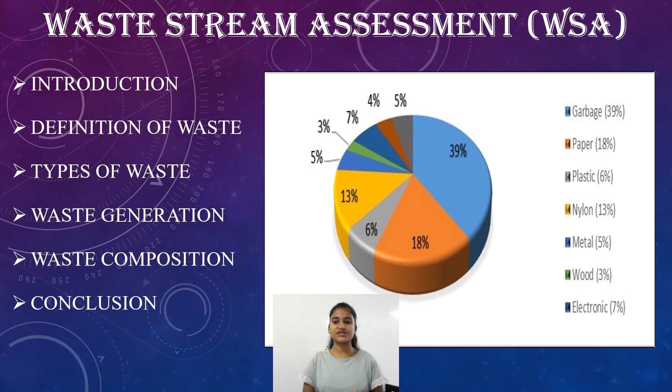Here we are going to learn the introduction of waste stream assessment, definition of waste, types of waste, waste composition, and the conclusion. Let us move to the introduction.

Waste stream assessment is a comprehensive process that involves identification, quantification, and characterization of the different types of wastes generated by the organization. WSA is a critical component of a waste management program as it provides valuable insights into the types and quantities of waste generated, and helps identify areas where waste reduction efforts can be focused.

This process is used to provide a detailed understanding of the waste stream and to identify opportunities for reducing, reusing, or recycling waste. Waste is generated by domestic and industrial activities, and the waste stream is the life cycle of waste up to and including its disposal.

Waste stream assessment can be obtained by two methods: rationale for analysis and field investigation. Rationale of analysis is planning or designing for disposing waste, and field investigation is waste storing, vehicle weighing, or field visits.

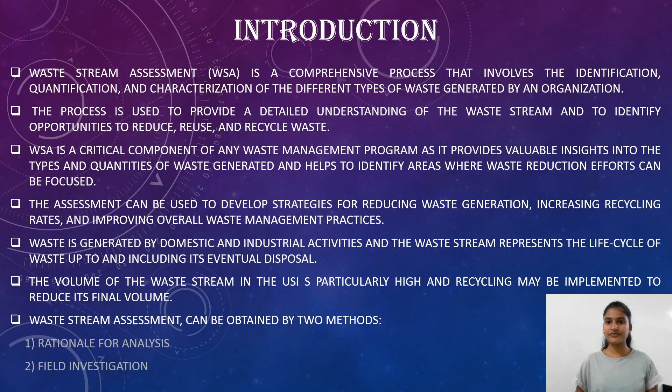Next we move to the definition of waste. Waste can be defined as any material or substance that is discarded or no longer used and has no further use or value.

Waste can come in many forms including solids, liquids, or gas, and can be generated from a wide range of sources. For example, waste includes food scraps, packaging materials, electronic devices, chemicals, and construction debris.

Waste can have negative environmental, social, and economic impacts. If not properly managed, it will pollute the surroundings or environment and impact human or public health. Waste management practices include waste reduction, recycling, composting, and landfilling. If not managed, it harmfully affects the environment and public health.

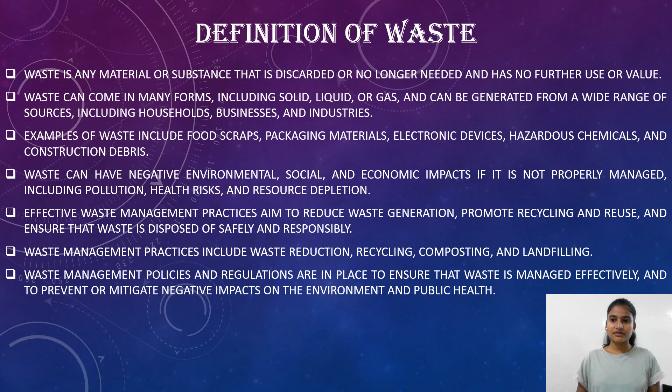Next, types of waste: municipal waste, hazardous waste, electronic waste, industrial waste, agriculture waste. Municipal solid waste includes waste generated from households such as food scraps, papers, plastics, vegetables, fruits and so on. Hazardous waste includes potentially harmful waste to human health and the environment such as chemicals, batteries, and medical waste, which is commonly thrown in rivers and such.

Electronic waste, or e-waste, includes electronic devices that are no longer functioning, such as computers, phones, televisions, or watches, etc.

Industrial waste includes waste generated from industrial processes such as manufacturing, mining, and oil and gas production, which pollutes the air and environment. Agricultural waste includes waste generated from agricultural activities such as crop residues, fertilizers, animal manure, and pesticides.

The types of waste are plastic, organic, paper, mixed, e-waste, glass waste, and so on. These are a few types of waste.

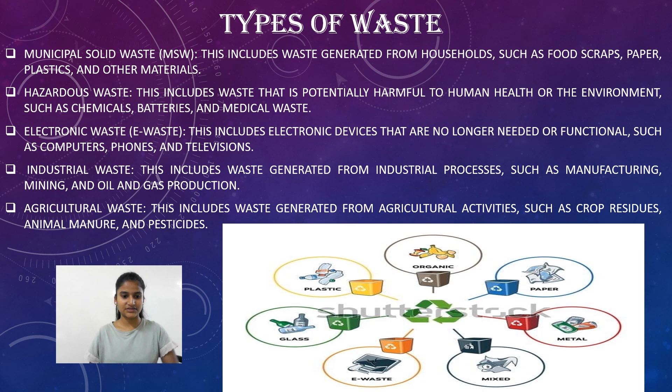Waste generation is the process of producing waste materials that are no longer needed or wanted. The amount of waste generated is influenced by factors such as population growth and economic development. Waste generation can be reduced by implementing waste reduction strategies.

For example, using cloth bags instead of paper or plastic bags, or using paper bowls. Waste generation can have negative environmental and human health impacts, as it can be very risky to health.

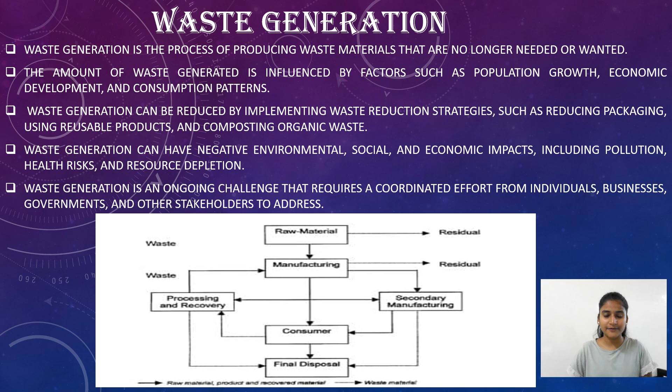This is the nature of waste generation, where manufacturing raw materials at each and every step generates waste. To avoid generating waste, we can use methods like recycling, reducing, or reusing.

Next, we will go to waste composition. Waste composition is the process of physically separating, weighing, or categorizing waste. This composition lets us separate different types of waste and categorize it. It can be used to determine the total amount of FLW and categorize the different types of materials that have been discarded.

For example, fruits, vegetables, meat, and so on. This illustrates this phenomenon in India - this is our waste composition in India.

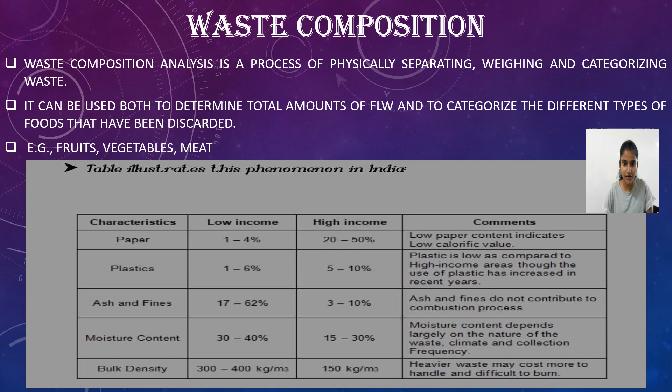Major constituents are paper and decomposable organic materials. Metal, glass, textile, and wood form part of the composition, and their relative proportion depends on local factors. Average proportions of the constituents reaching disposal sites in urban wastes are fairly constant, subject to long-term changes such as seasonal variations.

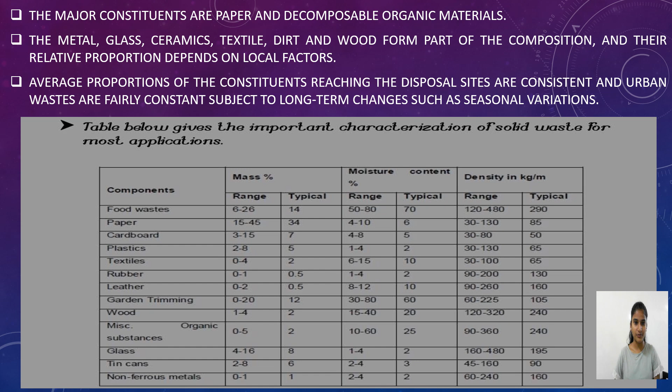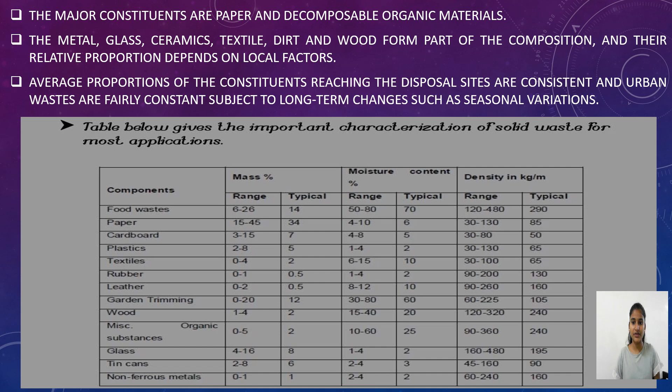This is important for the characterization of solid wastes for most applications. Here we can see food waste, paper, cardboard, plastics, textiles, rubber, leather, etc., showing how much is generated or composited, or the weight of the waste composite.

Waste stream assessment is an important tool to understand the type and amount of waste generated by households, businesses, and industries. Through this waste stream assessment, it is possible to identify opportunities for waste reduction, recycling, or reuse.

Materials that are no longer needed or are unwanted can negatively impact the environment and the economy. Waste composition refers to the types and amounts of materials that make up a waste stream, and it can vary depending on the source of the waste.

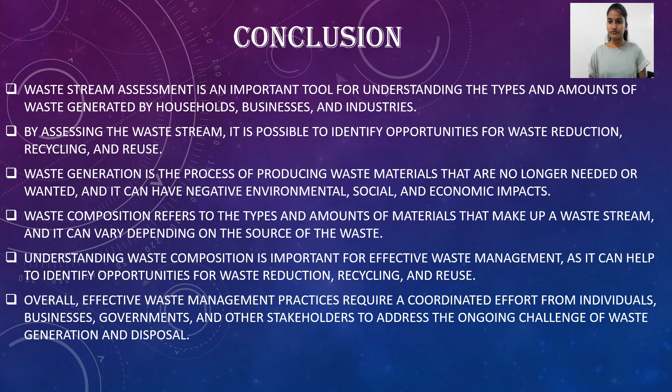Overall, effective waste management practices require a coordinated effort from businesses, governments, and other stakeholders to address the ongoing composition, characterization, generation, and disposal of waste. This is about waste stream assessment. Thank you everyone.